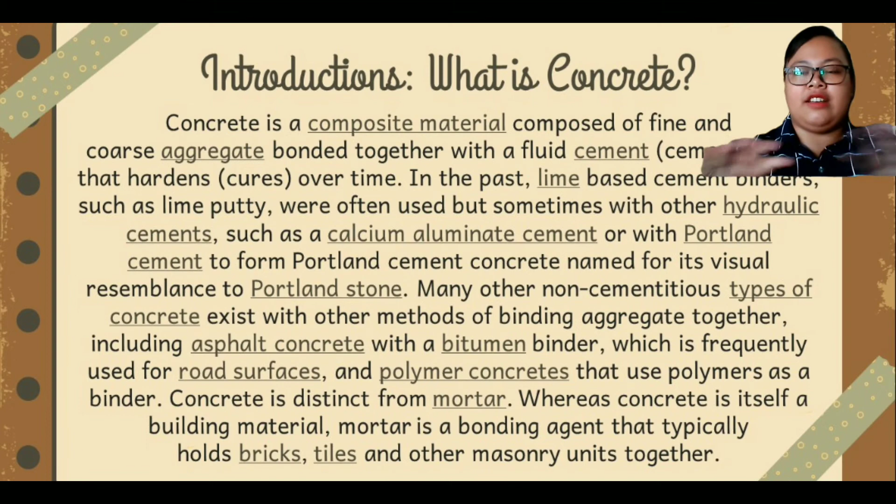The second topic is the material of concrete, how concrete is made, and what ingredients we need. In its simplest form, concrete is a mixture of paste and aggregates or rocks. The paste, composed of Portland cement and water, coats the surface of the fine and coarse aggregate. Through a chemical reaction called hydration, the paste hardens and gains strength to form the rock-like material known as concrete.

Within this process lies the key to a remarkable trait of concrete: it's plastic and malleable when newly mixed, strong and durable when hardened. This quality explains why one material, concrete, can build skyscrapers, bridges, sidewalks, superhighways, houses, and dams.

For skyscrapers, we can look at examples like Burj Khalifa and KLCC. For bridges, we can see Penang Bridge. For sidewalks, you can see the one opposite the toll, where so many people walk. Superhighways are like Karak Highway, and in Sarawak we have Pan Borneo. Houses are the places you live — you know what houses are. For dams, examples include Batang Ai Dam and Bakun Dam.

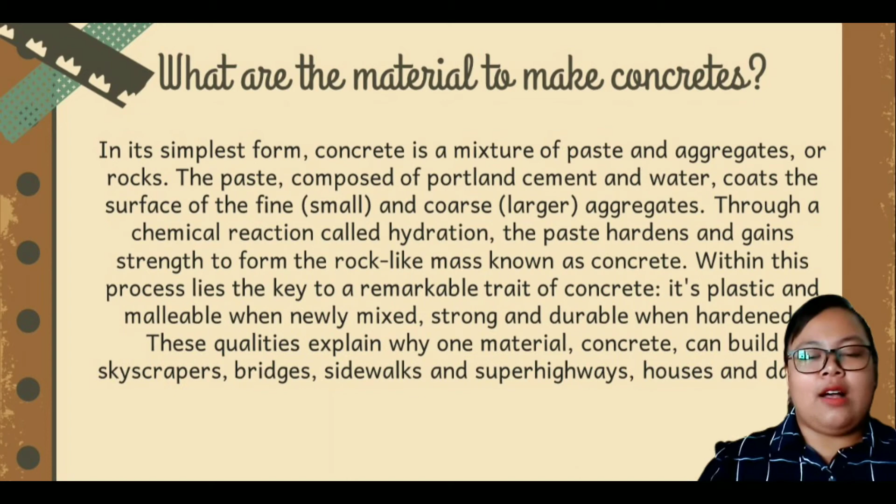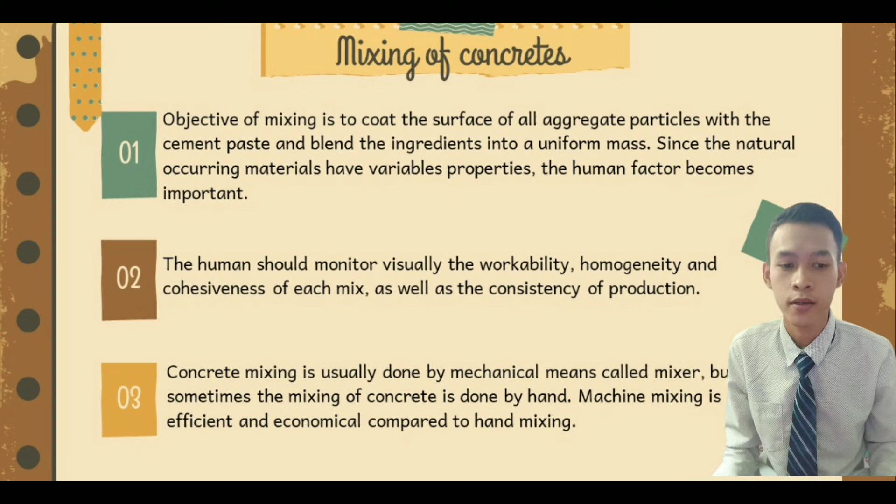Mixing of concrete. The objective of mixing concrete is to coat the surface of the aggregate particles with cement paste and blend the ingredients into a uniform mass. Naturally occurring materials have variable properties, so the human factor becomes important. The human should monitor the workability, homogeneity, and cohesiveness of the mix, as well as the consistency of production. Concrete mixing is usually done by mechanical means called a mixer, but sometimes mixing is done by hand. Machine mixing is more efficient compared to hand mixing.

To summarize the mixing process: first, the objective of mixing is to coat the surface of the aggregate particles with cement paste and blend the ingredients into a uniform mass. Second, naturally occurring materials have variable properties, so the human factor becomes important. Third, the human should monitor the workability, homogeneity, and cohesiveness of the mix, as well as the consistency of production. Fourth, concrete mixing is usually done by mechanical means called a mixer, but sometimes mixing is done by hand. Fifth, machine mixing is more efficient and economical compared to hand mixing.

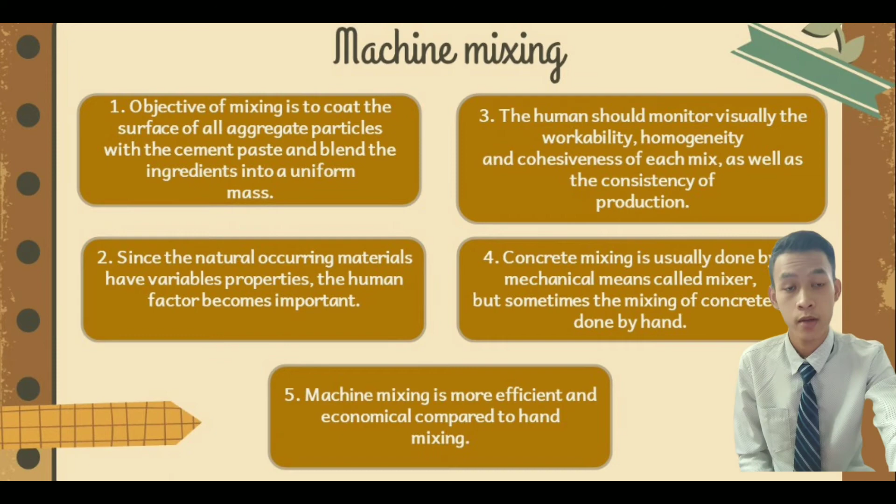Example of concrete mixing: the non-tilting drum mixer. A non-tilting drum is one in which the axis of the mixer is kept horizontal, and discharge takes place by inserting a chute into the drum or by reversing the direction of rotation of the drum.

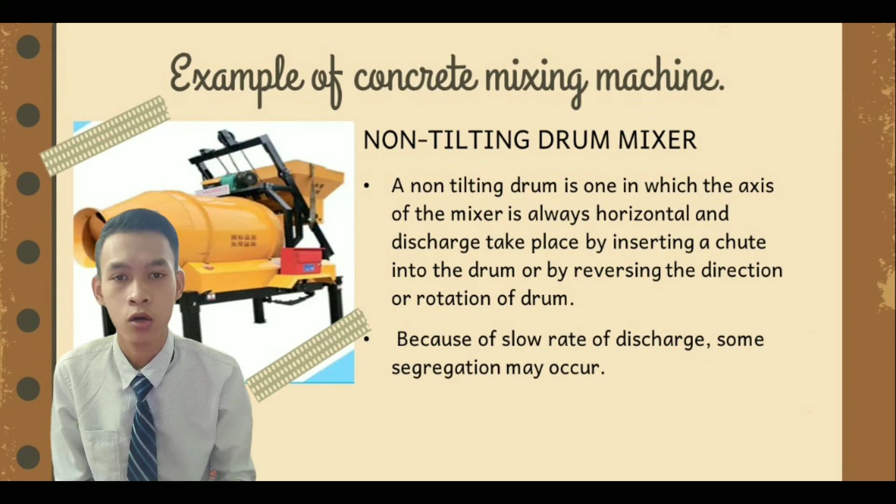Because of slow rate discharge, some segregation might occur. An example of concrete mixing is the dual drum mixer, which is sometimes used in highway construction.

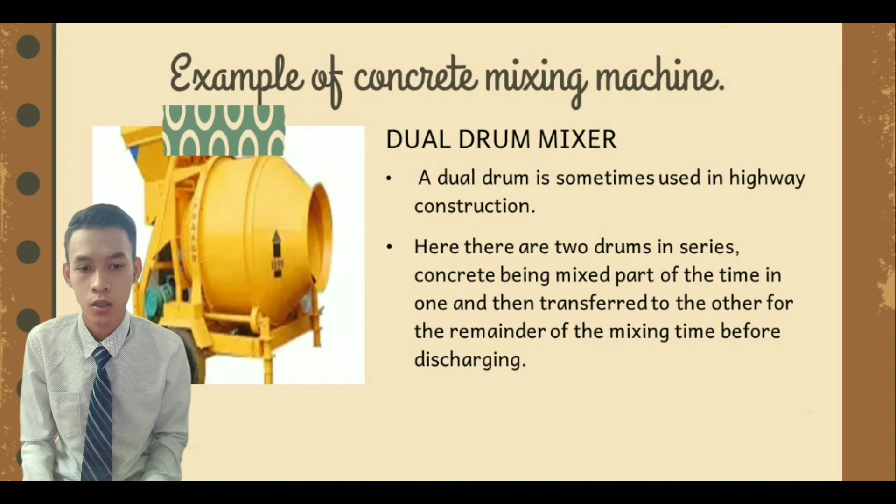There are two drums in series. Concrete is mixed part of the time in one and transferred to the other for the remainder of the mixing time before discharging. Next, hand mixing.

There are many situations when the concrete has to be mixed by hand, and because of this, quality is more difficult to achieve, therefore particular care and effort are necessary.

Number two, the aggregate should be spread in a uniform layer on a clean and non-porous base. Number three, cement should be spread over the aggregate and the dry materials mixed, turning over from one end of the heap to another and cutting with a shovel until the mix is uniform.

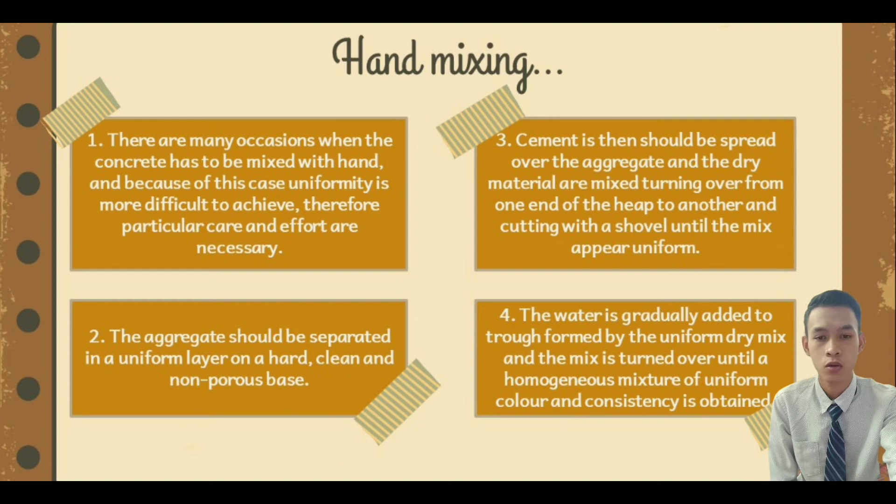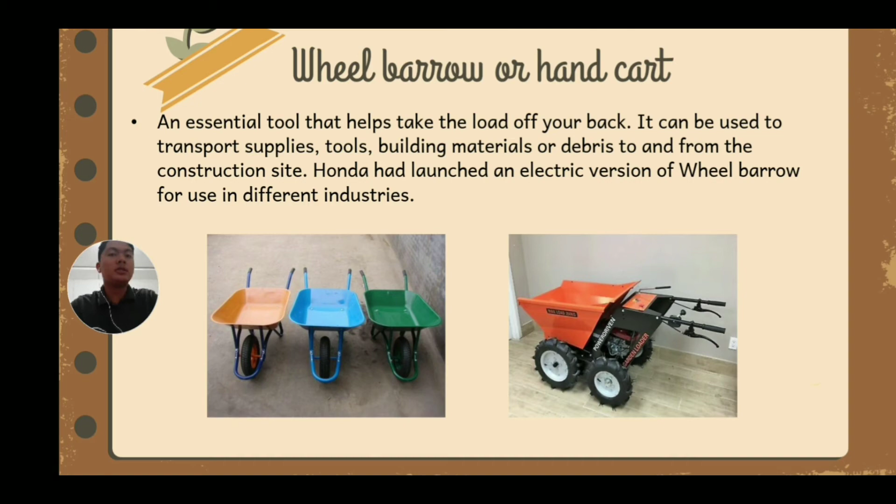Okay, second is crane, bucket, and ropeway. These are methods for transporting concrete above ground level. A crane is used for transporting concrete horizontally as well as vertically, and also inclined.

So it is also called two or three-dimensional transport. It is a familiar method in medium or large sites for high-rise construction projects. In this method, transport, placement of concrete takes place at a particular location.

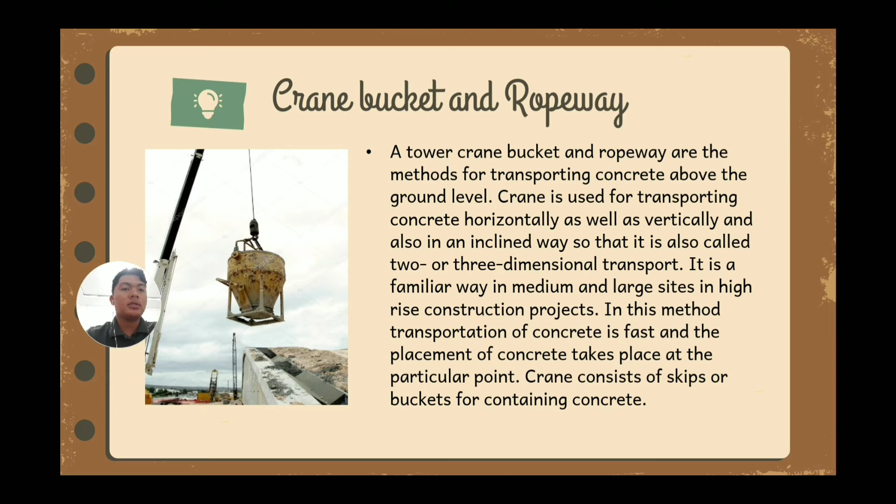Next is a chute. A chute is a device for transporting concrete from the ground level to a lower level. It is used when the labour cannot reach for placement of concrete due to limited space.

The surface should have some slope, not flatter than 1 vertical to 2.5 horizontal. Concrete may get slightly compact mass without any segregation.

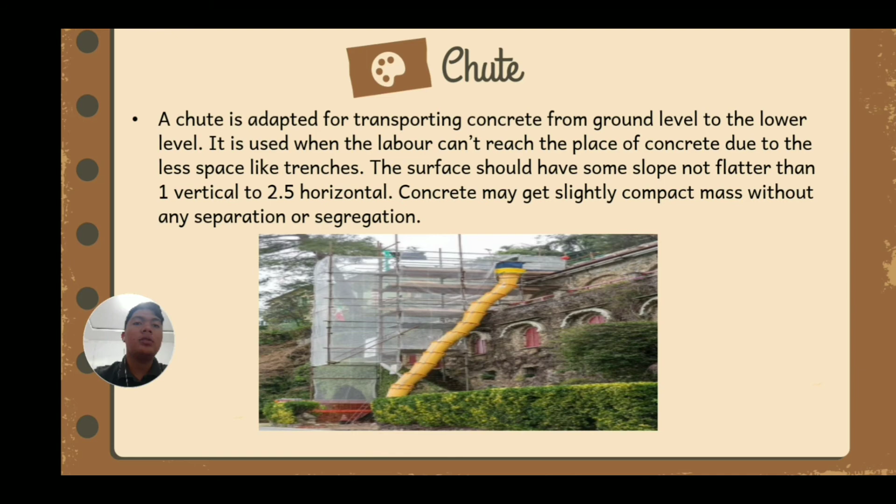Okay, next is the transit mixer. The transit mixer is one of the most popular equipment for transporting concrete over long distances, mostly in an RMC plant, where they mix concrete. The transit mixer is mounted on a truck and may have a capacity of 4 to 7 cubic meters.

Concrete is continually agitated in the truck with 2 to 6 revolutions per minute. A small pump is fitted on the truck mixer for discharging concrete. Concrete fed into the mixer can be batched dry or with water mixed in. If the mix is wet, it must be reached to the site within 1 or 1.5 hours.

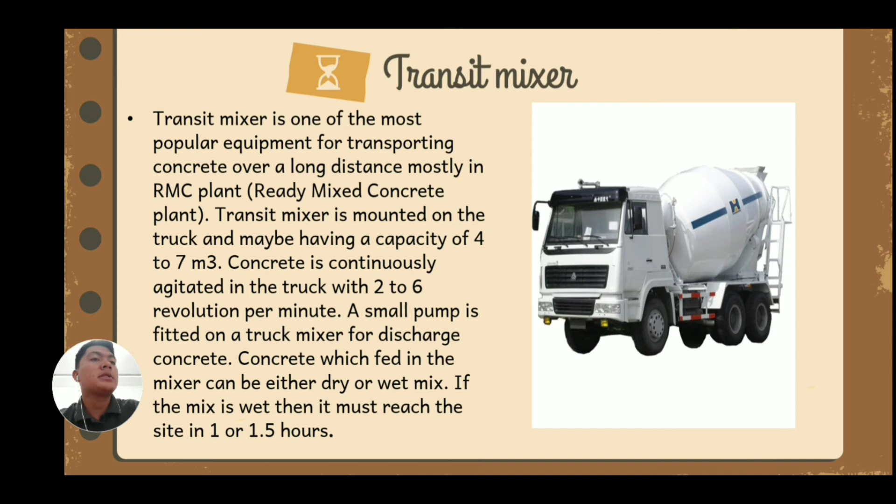Next is belt conveyor. Belt conveyors are used for a small distance such as 5 to 10 meters. The initial cost for setting up the belt conveyor is high, but it can place large volumes of concrete quickly where access is limited.

Concrete may get segregated on steep inclines as the belt passes over the roller. It is suggested that low slump concrete be used for slow moving belts and high slump concrete for fast moving belts.

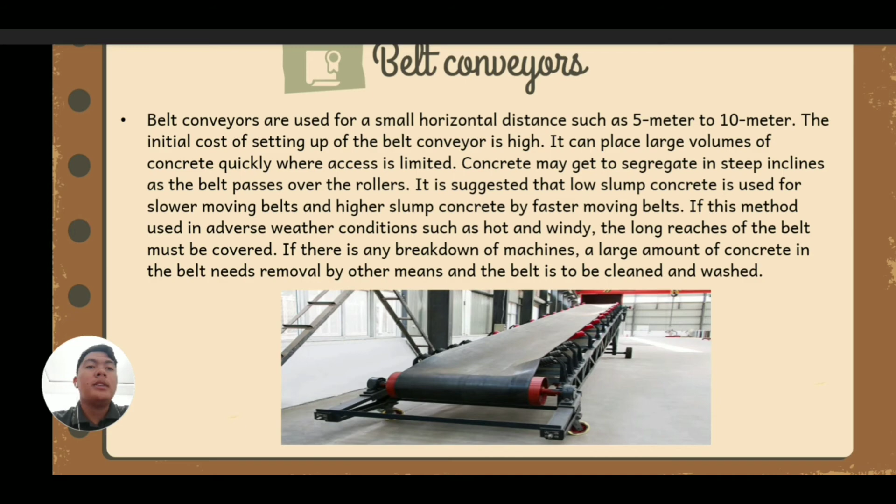If this method is used in conditions such as hot and windy weather, the long reach of the belt must be covered. If there is any breakdown of the machine, a large amount of concrete in the belt needs to be removed by other means and the belt is to be cleaned and washed.

Thank you, Ambrose. Now I want to present about the types and uses of concrete. The types of concrete we get are ten.

Type of concrete number 1 is plain and ordinary concrete. The main constituent materials of concrete is aggregate, water, and cement. As the reinforcement is missing, this type of concrete is suitable for the structures, and in which high tensile strength is not necessary. This is an example of plain and ordinary concrete.

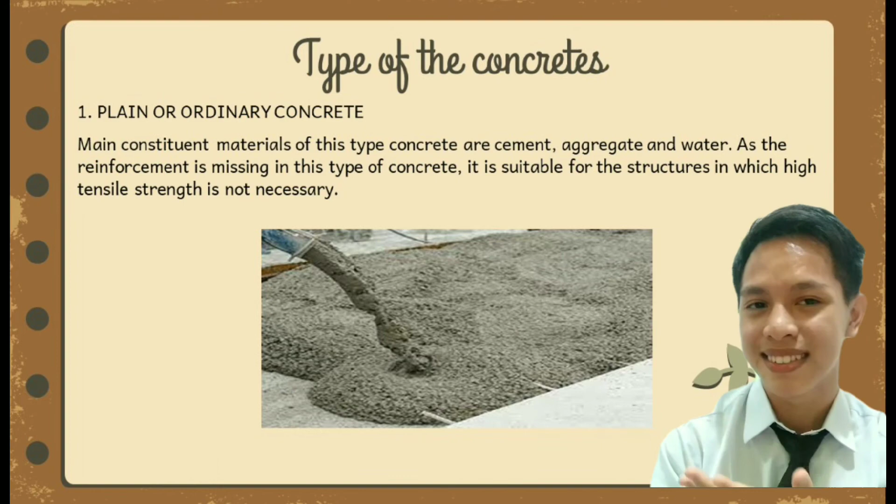Type of concrete number 2 is reinforced concrete. Reinforced concrete introduces reinforcement into the plain concrete. Reinforcement is provided by steel rod and wire mesh. The combination of rebar and plain concrete withstands tensile and compressive force, and we have a single material. Nowadays, almost all building structures use this type of concrete.

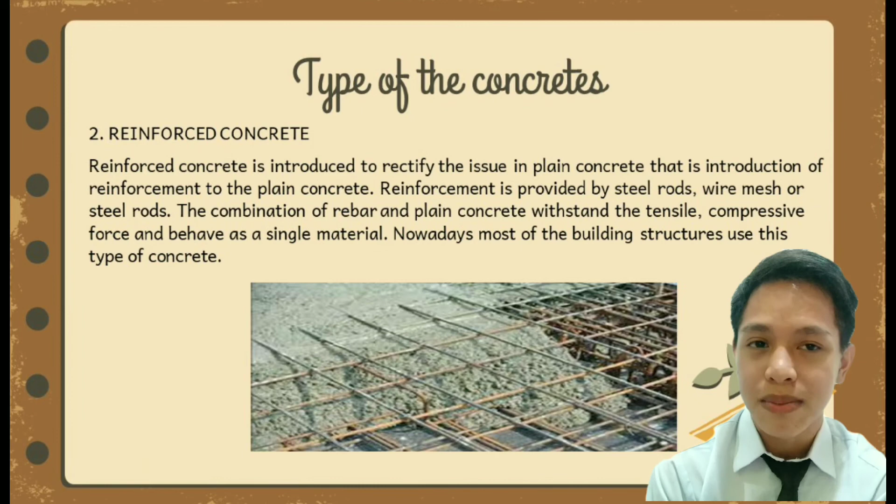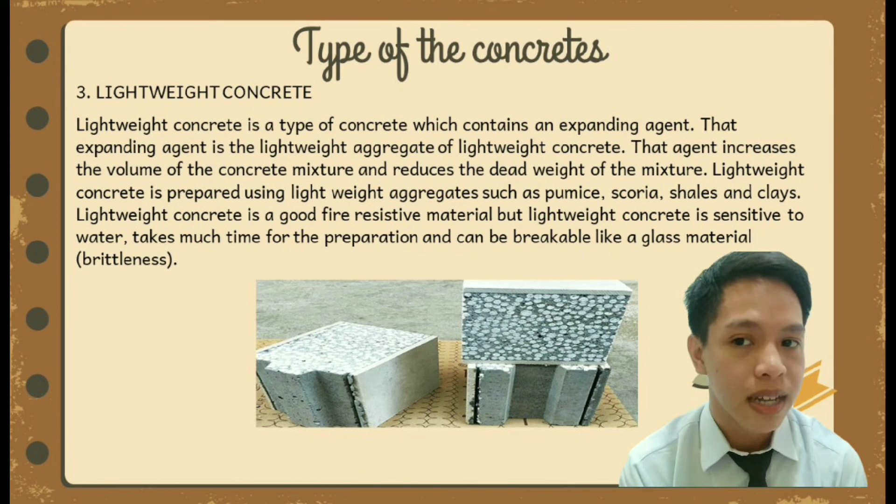Type of concrete number 3 is lightweight concrete. Lightweight concrete is a type of concrete which contains an expanding agent, and that expanding agent is the lightweight aggregate of the concrete. This aggregate increases the volume of concrete material and reduces the dead weight of the material. Lightweight concrete is prepared using lightweight aggregates such as pumice, scoria, shale, and clay. Lightweight concrete is a good fire resistive material, but it is sensitive to water and takes much time to prepare, and is breakable like glass material. This is an example of lightweight concrete.

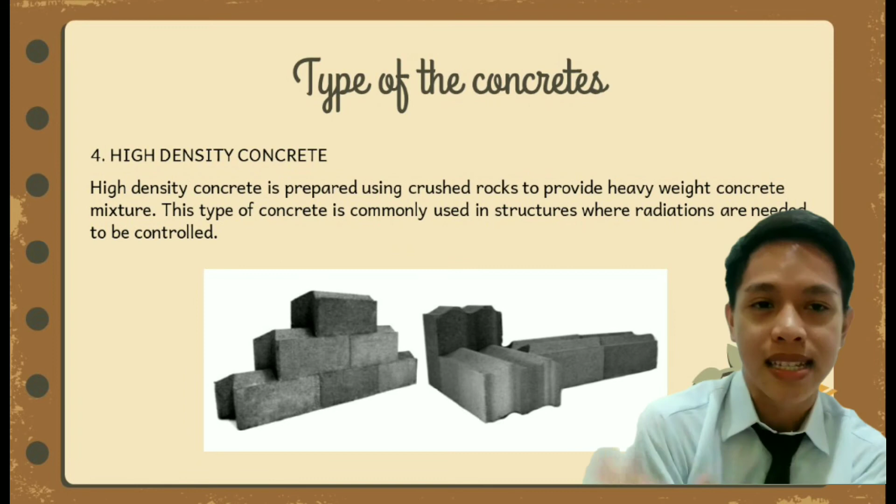Type of concrete number 4 is high density concrete. High density concrete is prepared using crushed rock to provide high weight concrete. This type of concrete is commonly used in structures where radiations need to be controlled. This is an example of high density concrete.

Type of concrete number 5 is precast concrete. Precast concrete means the concrete is prepared, cast on reusable moulds, and cured in the factory. Normally, structural components of prefab use precast concrete. This is an example of precast concrete.

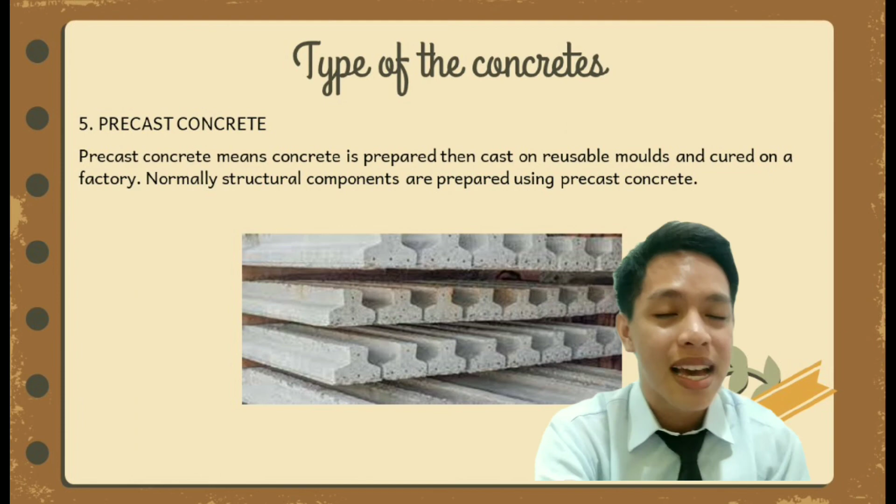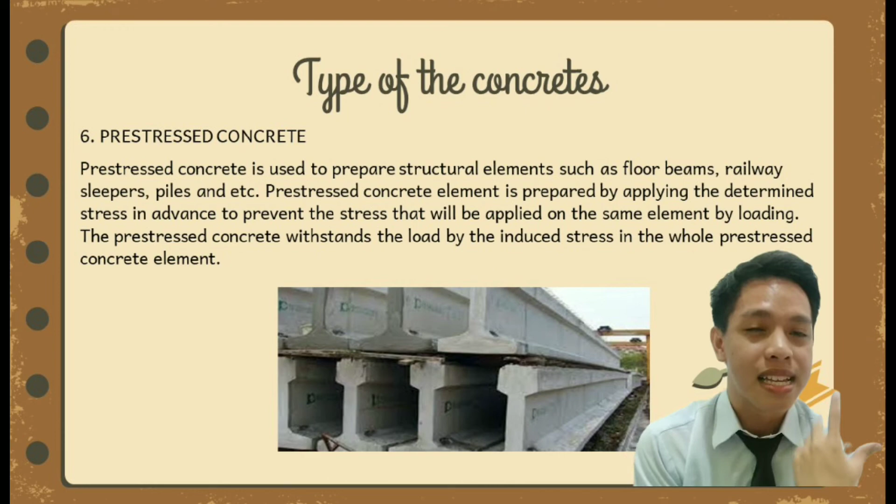Type of concrete number 6 is pre-stressed concrete. Pre-stressed concrete is used for prefab elements such as floor beams, railway sleepers, and so on. Pre-stressed concrete is prefabricated by applying determined stress in advance to prevent stress that will apply to the same elements by loadings. The pre-stressed concrete withstands loads by the induced stress in the whole pre-stressed concrete elements. This is an example of pre-stressed concrete.

Type of concrete number 7 is glass reinforced concrete. Glass reinforced concrete is prepared as a concrete matrix containing strengthened alkali-resistant glass fibers. The composite performs well to withhold the weight of load. This type of concrete is used in cladding works. This is an example of glass reinforced concrete.

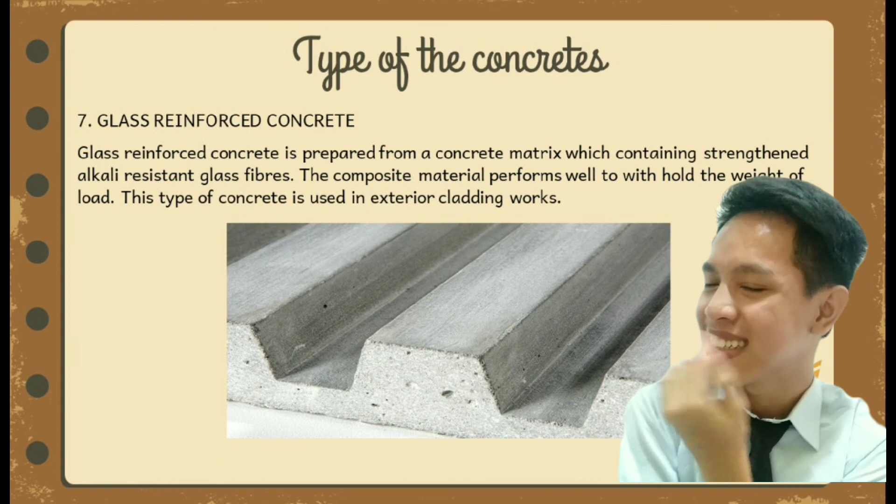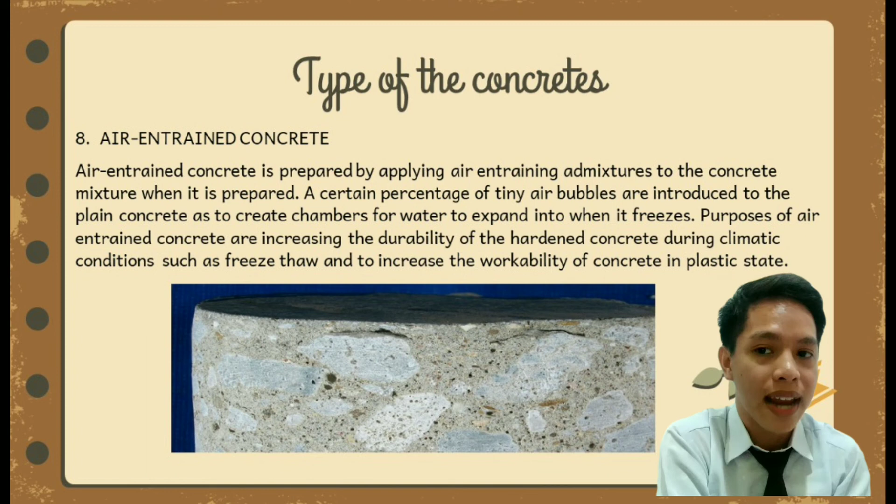Type of concrete number 8 is air-entrained concrete. Air-entrained concrete is prepared by applying air entraining admixtures to the concrete mixture during preparation. The percentage of air bubbles introduced into the plain concrete helps create chambers. The purpose of air-entrained concrete is increasing the durability of the hardened concrete, such as freeze thaw, and increasing workability for the concrete in the plastic stage. This is an example of air-entrained concrete.

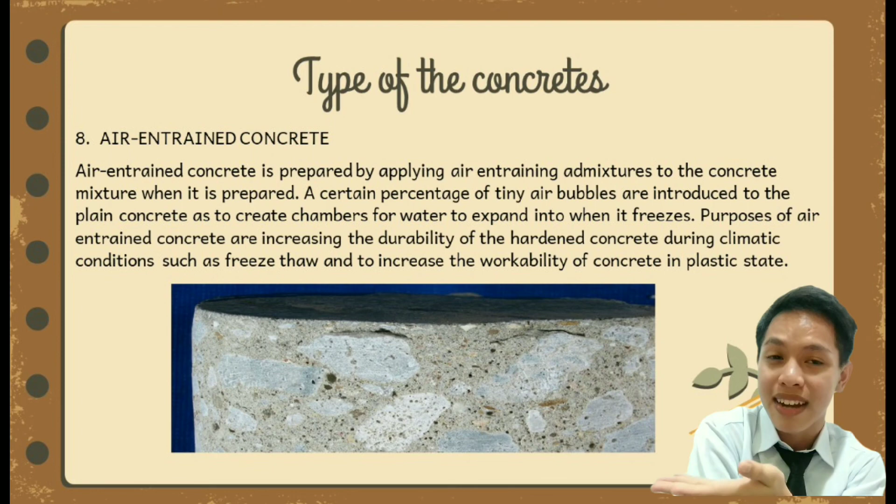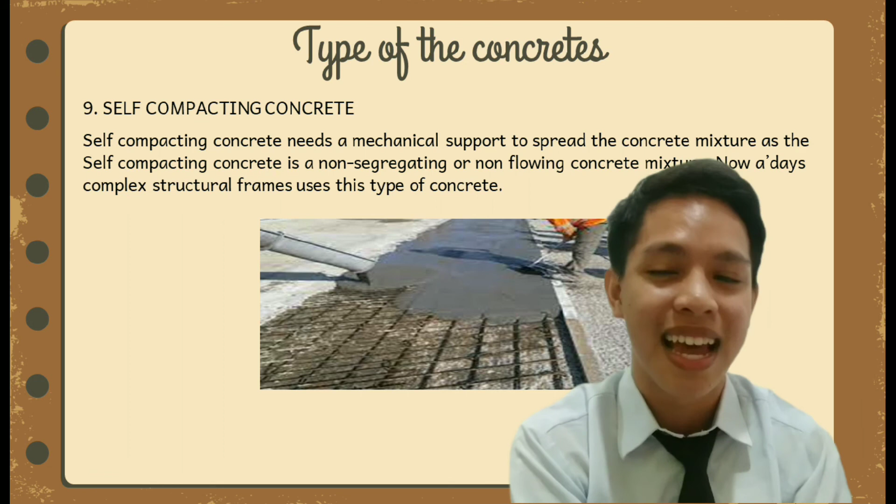Type of concrete number 9 is self-compacting concrete. Self-compacting concrete needs no mechanical support to compact the concrete, as the concrete flows by itself without vibration. Nowadays, this concrete is famously used by contractors building houses, flats, and so on. This is an example of self-compacting concrete.

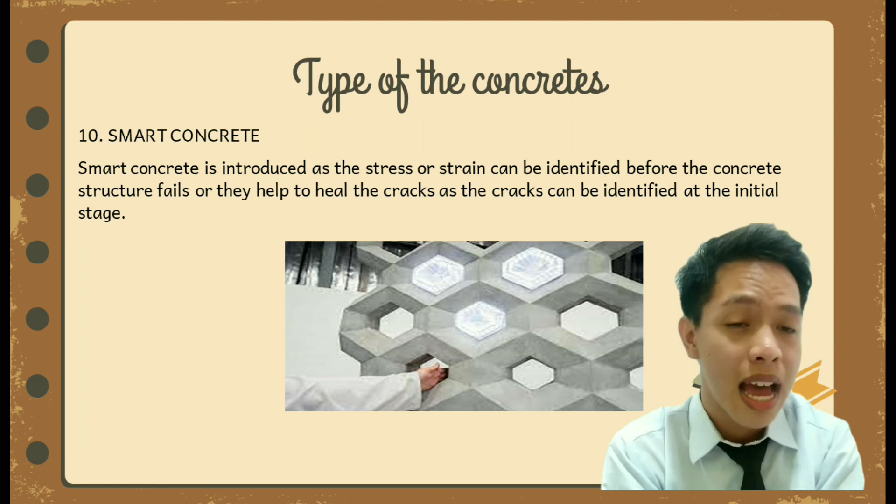Type of concrete number 10 is smart concrete. Smart concrete introduces stress and strain that can be identified before the concrete structure failure occurs, identifying failure at an initial stage. This is an example of smart concrete.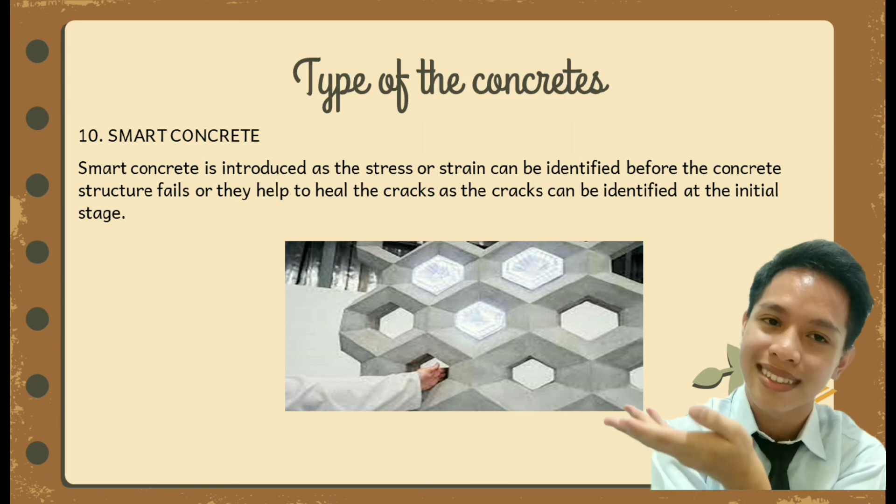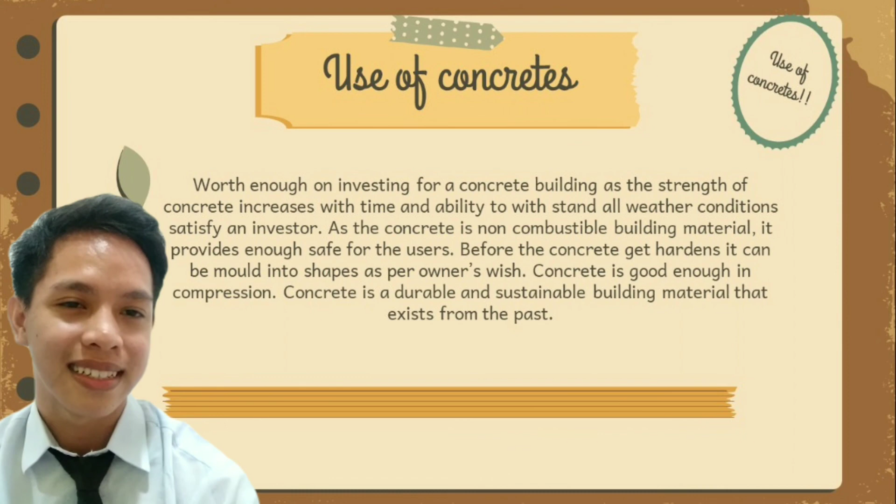Conclusion from the presentation: when we make concrete, we must have three elements. Number 1 is aggregate, number 2 is water, number 3 is cement. But we must be alert to the condition - if the aggregate is less than the water and cement...